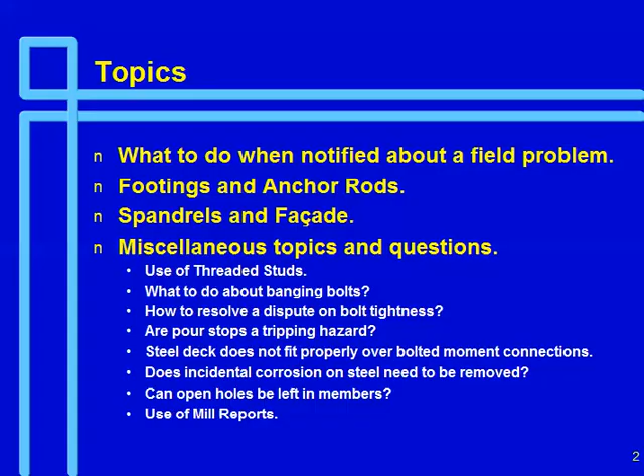And Larry ends up with the welding topic here, and then I take over again after lunch, dealing with rooftop units, joists and joist reinforcing, several slides on crane buildings, which is my true love. And then Larry gets into specifications, how to create good ones to avoid problems, and into some connection design, and then we also take other questions. So that's the format.

They were kind enough to put water down here with all the electrical stuff for me, so I'm very careful to how I pick that up.

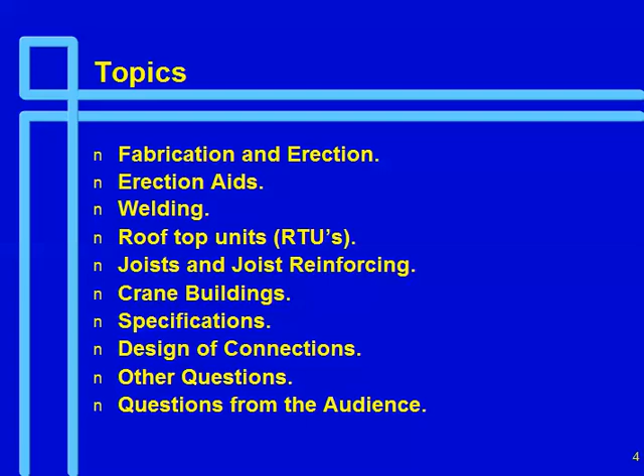Okay, what to do when notified about a field problem. When I first started in business as a consultant, which was 1973, you got a problem from the field and someone would call you on the telephone. They'd say, take out a piece of paper and now draw a north arrow, and then you'd describe which grid line you were at, and then someone would try to describe the problem, and a couple of days later you might get photographs. Today it's much better. The contractor who's ever at the site can take plenty of digital photographs. You can have them instantly, and you can much more easily identify what you're dealing with. So that's a really good thing.

But make sure when you get the information that you have as complete and accurate information as you can get. I can't tell you the number of times where I started off on trying to fix something and I really didn't have all the information, and then you start over again. So try to not go crazy right away, but think about the information you've received. Does it sound like it's complete? Have you really identified the problem?

The next one is kind of hard for some people to swallow, and that's to act immediately to avoid delay charges. Now the problem as I see it, here I am the designer. There's a problem. I don't know if it's my mistake, error, or somebody else's. But I've come to learn it doesn't matter, okay? If it's a big enough problem, you'll be involved anyway. But do something, take charge, act immediately, because the big cost on any of these problems relates to delay charges.

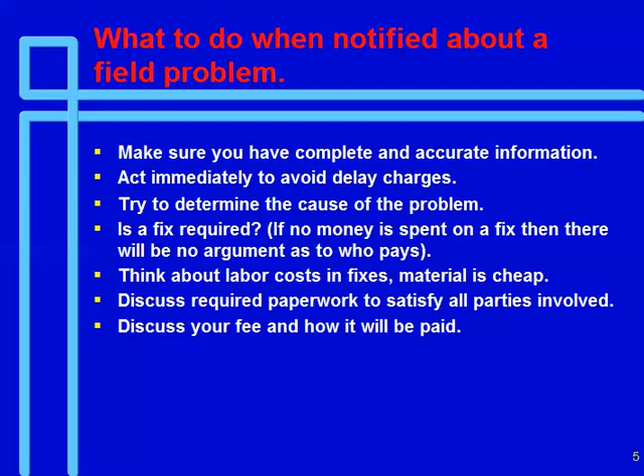Many times I found that the erector or fabricator will propose a fix. That fix may be one that he or she has used in the past. They may have seen a similar problem, and it may be perfectly adequate. But your job as the engineer is to make sure that it is adequate, that it is the right fix.

The other thing that I think is very important is if, for example, the erector proposes a fix, listen very carefully. You may have a better idea, okay? But your better idea more than likely will cost more. Because the erector, or the fabricator, if it's their idea, they're going to price it as they think it should be priced. And if it's somebody else's idea, I can almost guarantee it's going to cost more. So think about that. Listen to their ideas.

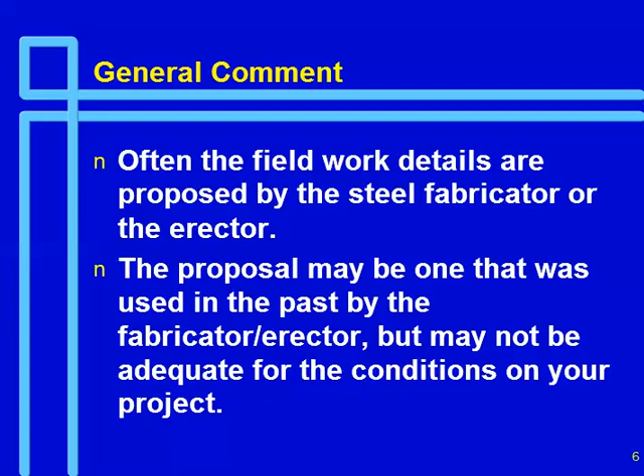Accept them if they're structurally sound. If yours is clearly much cheaper, you'll find out. But listen to the construction team.

The biggest topic, of course, is footings and anchor rods. This is absolutely one of my favorite pictures. I took this picture in Boise, Idaho a number of years ago at a construction site where it was a beam and column job, and the erector put up a beam tying two columns together. These were about 45-foot high columns. The one you see laying on the ground here is, I can't remember, it might have been a 16-inch HSS. It was at least 12 by 12, I remember that.

They went to lunch, a little 30-mile-an-hour wind came up. They had not tied one of the beams off on one of the columns. It slipped off, and it pulled the building down.

Usually what happens, and those of you that have gone to the job site and seen an erection collapse, usually the anchor rods break. And the erector says, green concrete. You've all heard it probably. Green concrete, or there's something wrong with the anchor rods. I'm trying to say anchor rods. I just said anchor bolt one time, didn't I?

You know why we say AISC wants us to say anchor rods instead of anchor bolts? Because too many of us thought they were bolts. And we would specify a bolt that couldn't be long enough. Or we put the hole in the base plate thinking it was a bolt hole and not an anchor rod, and there's not enough clearance. So we'll talk about that later, but that's why we try to say anchor rod.

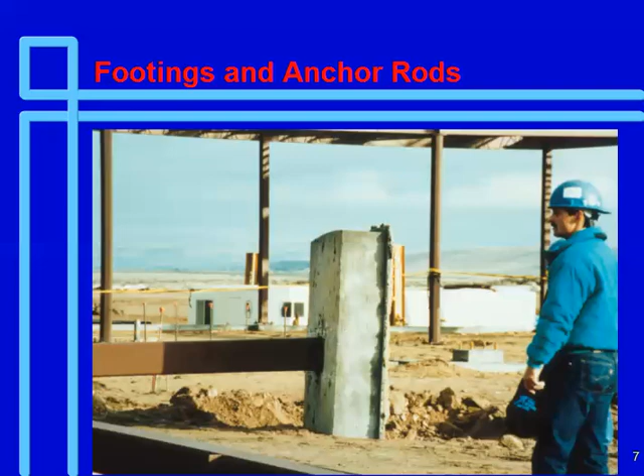What's the proper specification for anchor rods? ASTM F1554. It's not 307 anymore, it's F1554. There are 2 items of interest, what I call classification and product marking, and we're going to talk about those on the next couple of slides. But I do want to make the point before I forget it: consider the use of epoxy anchors on certain projects that may require a complex layout, because you're more likely to get the epoxy anchors in the right place than you are anchor rods. So we'll talk also about that later.

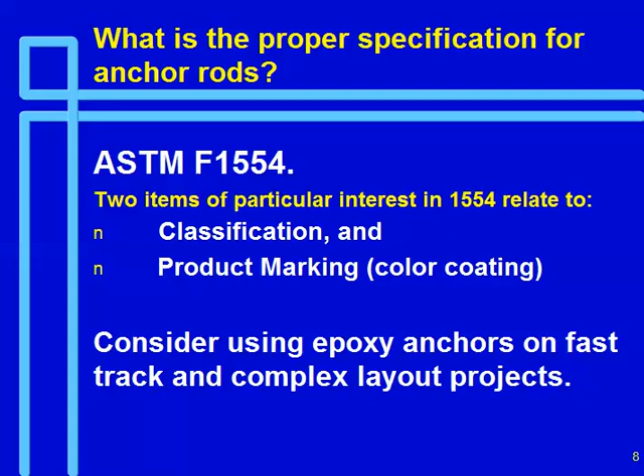1554 has 3 grades of anchor rods. You can get a 36 KSI rod, a 55, and a 105 — different strengths. And the product marking is, if you have a 105 KSI anchor rod, it's supposed to be painted red on the end of the rod to identify it.

That end will probably get buried in the concrete, but it's supposed to be red on the end. The 55 is supposed to be painted yellow, and the 36 blue. Often they don't paint the 36 because it's the lowest grade, so you won't find those painted very often.

The other important thing to remember is if you need a high-strength anchor rod, and you want it to be weldable, you can ask for the 55 KSI rod to conform to supplement S1, which makes it a weldable steel. Now, why would you want an anchor rod that could be welded? Because it'll help you in field fixes, that's why.

I encourage you, unless you absolutely have to use high-strength steels, do not. Use the 36 KSI anchor rods that are weldable. It's much better to use bigger anchor rods and fewer of them than smaller, higher strength anchor rods. For example, with 4 anchor rods, it's a lot easier to get in the right spot than with 8, 10, or 12 anchor rods. It just is much easier.

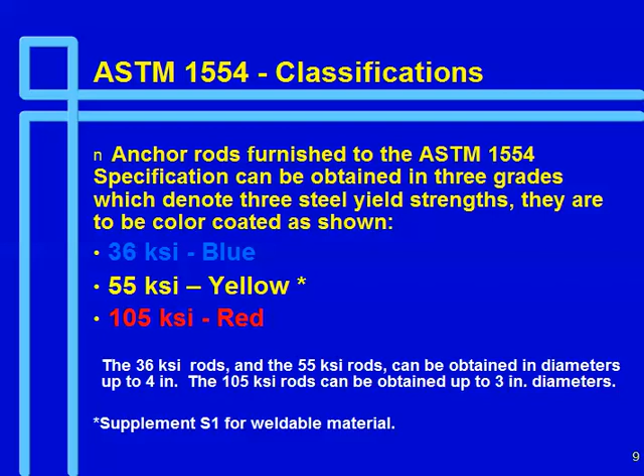So be aware of that. Try not to use the high-strength anchor rods, and I'll probably mention that several times.

Remember that OSHA has requirements that we use 4 anchor rods in every column except for minor posts, and that the anchor rods are to be designed for a 300-pound person, 18 inches eccentric from the column face. That takes nothing. You don't even have to think about it.

If you've done the calculation once, you know that 3/8-inch anchor rods will work. And I'm not saying you should ever use 3/8-inch anchor rods, but I think that OSHA requirement gave erectors a false sense of security about the stability of columns. But it does allow a person to go up and be 18 inches out without the anchor rods failing.

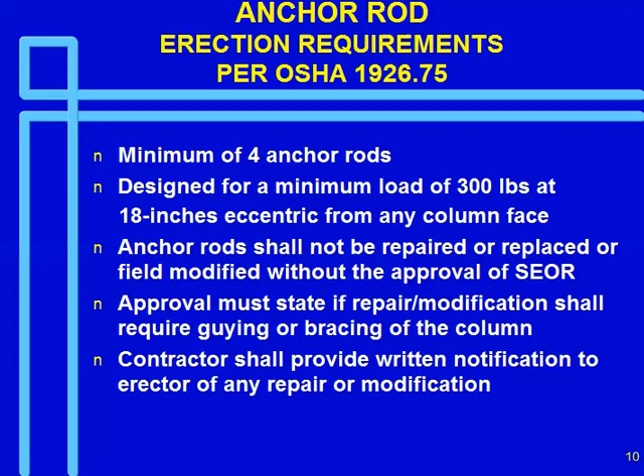Also remember that anchor rods cannot be repaired or replaced unless there is approval of the structural engineer of record, and we go on with other requirements that must satisfy OSHA.

Okay, one of the first problems: anchor rods in the wrong position. This is a pretty drastic one. This was actually on one of our projects years ago. You can see there was a fair amount of torching that went on and some slotting to make those anchor rods fit.

Here's one where you should evaluate. It turned out on this job, we left the torch holes there. The only thing we did to stabilize this column was use some plate washers rather than regular washers. But we evaluated it and it was fine, so we left it alone.

As I give talks, my mind wanders. It's not wandering quite so much this morning yet, but I was thinking about the number of times this has happened in the past, and it's a big number. I was also thinking of the number of times I did what I thought were crazy things to fix these problems, and maybe you've done them too.

The two that come to mind: there was once a project in Poughkeepsie, New York, where a footing was poured and the anchor rods were poured roughly 12 feet from where they were supposed to be. It was a pretty big footing with a pier on it. I looked at it and thought, hey, we can pick that sucker up with a crane and just move it over to the right spot. And we did.

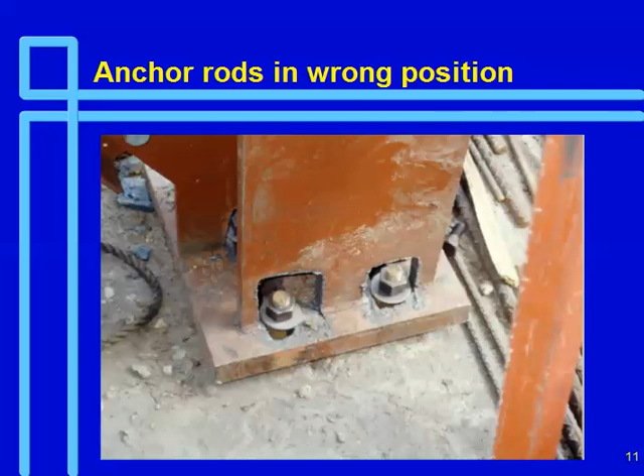I had that once. In fact, I'll tell you, it was a monster footing. It was in a steel mill, 30 foot by 40 foot by 8 foot deep. We put it in the wrong spot. They had to blow it out. No back charge. Great client.

Larry gave me this picture. There's the template.

Now, the interesting thing here is that the template was made wrong. The engineer showed center of template to anchor rod as 8 inches. Whoever made the template thought it was 8 inches center to center of rods. So they did it that way.

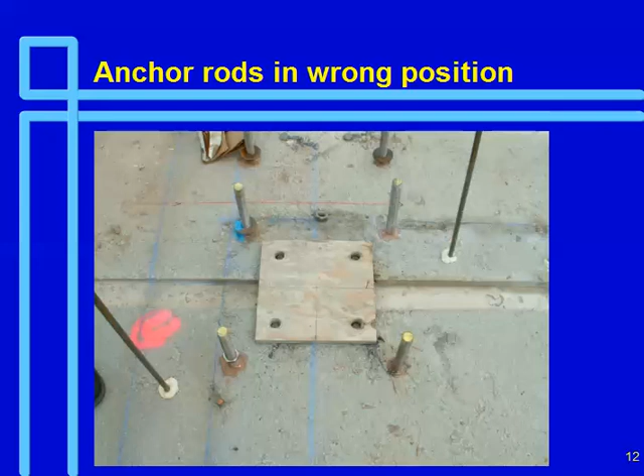There's the old anchor rods cut out right here. They used the template correctly, but then new epoxy anchors had to be put in, and not just a few. This job had 1,300 anchor rods, so there was, I'm sure, a bit of a back charge on that one. So it happens.

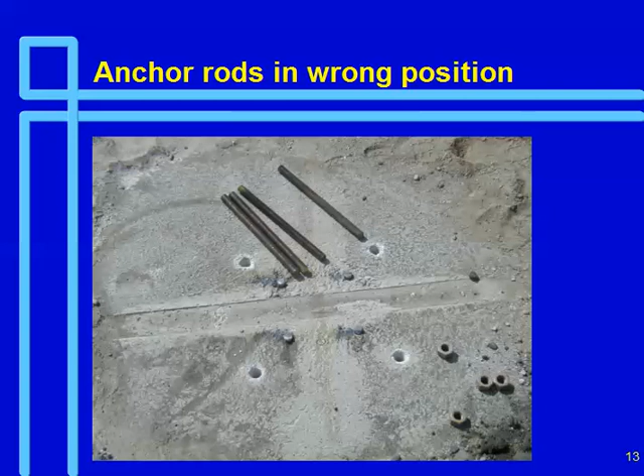Anchor rods in the wrong position. What we'll never solve—I'm convinced we're never going to solve that from not happening. Okay, we can try.

But the solution, if it does happen, is to evaluate the need for all the anchor rods. Maybe you don't need them all. Cut the rods off, use epoxy anchors. You might have to cut the base plate off and use plate washers, or fabricate a new base plate. Cut it off the column, make a new base plate that fits, re-weld it to the column. You may have to relocate the column on the base plate and adjust somewhere else, or modify the column web or column flange.

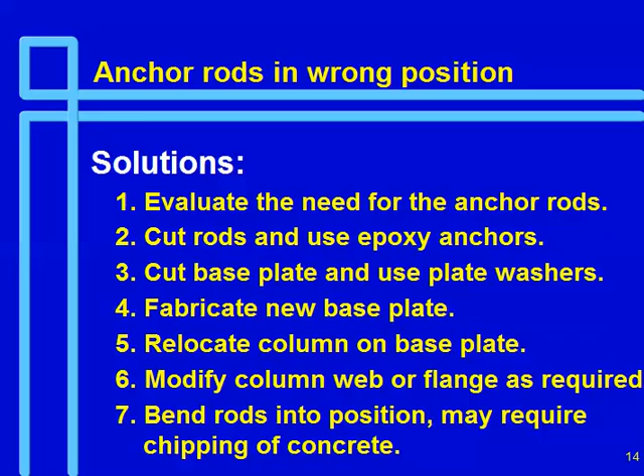Or if the rods aren't too far out of position, it may be that you can bend them back into position, which may involve some chipping of the concrete. And I have a slide on that. Consider the use of epoxy anchors.

Hilti has a HIT-TZ anchor that's relatively new that can be put in fairly nicely in adverse conditions. The holes don't have to be perfectly clean. The interesting thing is a Hilti 3/4 inch epoxy anchor has a strength of about 12,600 pounds, even if you just put it 5 1/4 inches deep into the concrete, which is almost equal to the 3/4 inch 36 KSI anchor rod, which has about 14,000. So you get pretty good strength.

And quite often, you and I know, they're just there to be there. Once the building's up, you don't need them. On a very important job, or some job, you might want to consider proof testing or proof loading some of these anchor rods, one or two of them anyway.

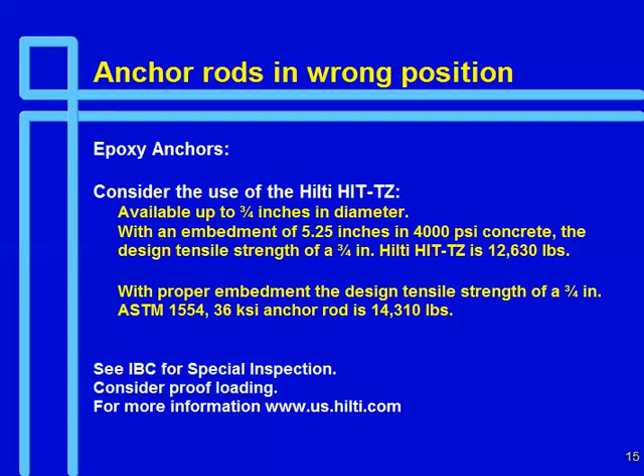Like I say, I don't think we can prevent this from happening, but in your specs you should certainly have a qualified field engineer to lay out the anchor rods.

I remember when we were writing this, Larry and I went round and round. I, as the engineer, said, oh, you must have a registered surveyor do this. That was what was in our specification. He said, no, you don't need a registered surveyor. You need a qualified person, because so often on the job site, you'll find that the qualified good surveyor knows more about checking things on a construction site than does a registered surveyor. So I compromised—actually I didn't compromise, I yielded to him and said use a qualified field engineer.

We say survey before column fabrication. I think that's baloney—the two fabricators here know it's baloney. You're already fabricating by the time the anchor rods are going in. But if you can, that would be a good idea.

Use the AISC recommended hole sizes. Use symmetric patterns for the anchor rods—that is, use an 8x8 pattern or a 12x12, not a 6x8. That way you will get them at least oriented in the right direction. Although, depending on your column, you can have it put up the wrong way. So there's pluses and minuses.

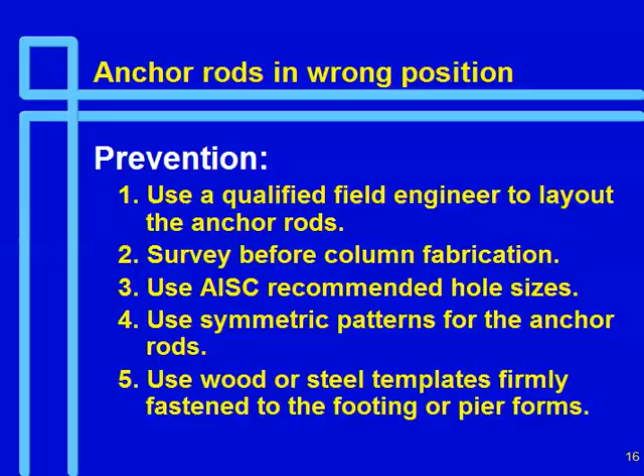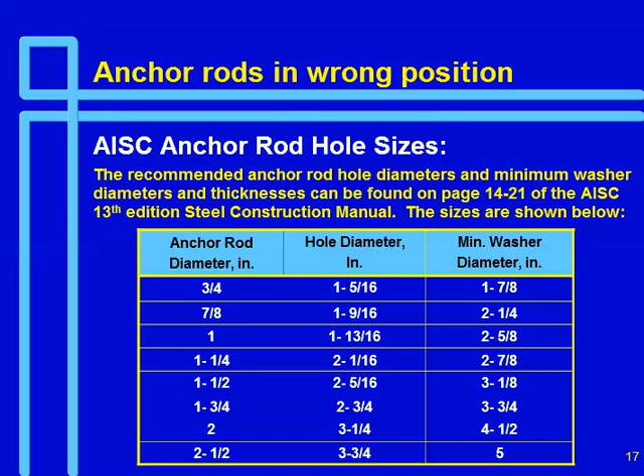These are the AISC anchor rod hole sizes. They're in the new 13th edition; they were in the last edition of the AISC LRFD manual. You can see here that these are pretty big holes. If you have a 1-inch anchor rod, the recommended hole size is 1 13/16 inches, and the washer diameter is shown here. If you thought of these as bolts, this would have been a 1 1/16 inch hole—it just wasn't going to fit. So those are the recommended hole sizes.

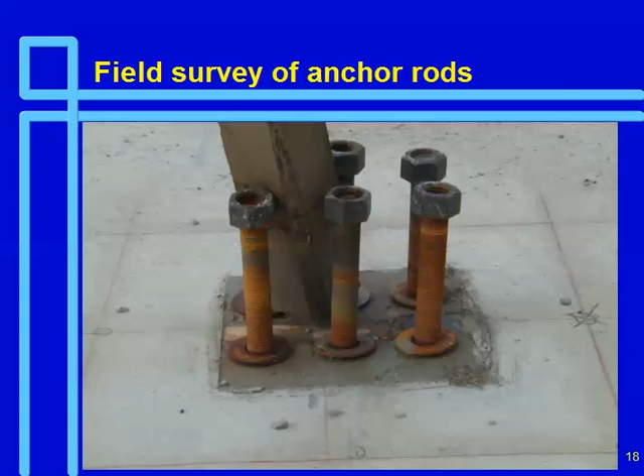This is also a picture that Larry Kloiber gave me, and this one the base plate was refabricated, because you can see there's a god-awful amount of anchor rods there, and they didn't fit. So they refabricated a base plate and cut it off the column, and now the column is refit to this stub that was down here. Lots of thread length on those too.